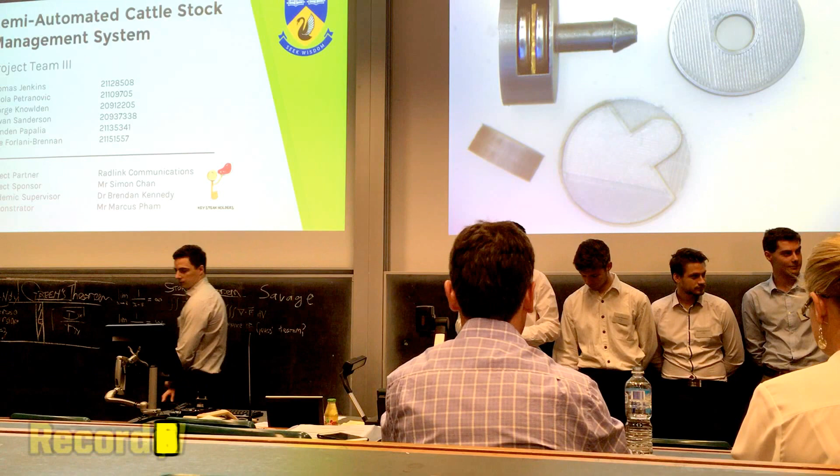This is Project Team 3, which is a very snappy name. No one gave their teams good names this year.

Anyway, they're going to talk about the semi-automated cattle stock management system, and let's start when they're ready. Okay.

Australian cattle farms are experiencing attrition rates higher than ever before. Every year, up to 48% of Australian cattle lose their lives due to undetected bovine-borne diseases. This costs Australian farmers over $270 million every year, a cost that can be avoided through implementation of the appropriate technology.

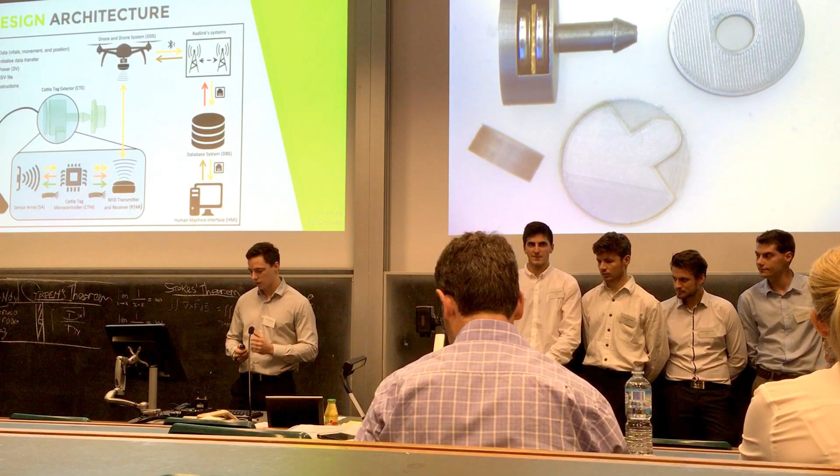What if each cattle was equipped with a cattle tag that could sense the cattle's health vitals, where a drone collected this cattle vital data, sent it through to a database, which then went to a human-machine interface that alerted the farmer of their cattle's health and location.

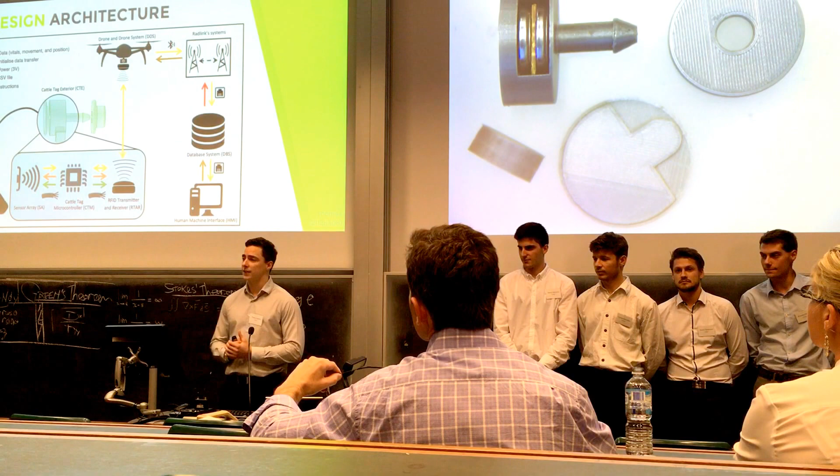This is the essence of the semi-automated cattle management system that myself, Nikola, George, Evan, Branden and Jade have fostered over the duration of this semester. The goal of this project was to assess the feasibility of a drone-based cattle management system.

Now, the first individual component to be discussed is the cattle tag exterior. This encloses the circuitry. As we can see on the visualizer, we have a prototype for you. This cattle tag exterior will protect against intrusion and environment and provides attachment to the cattle's ears.

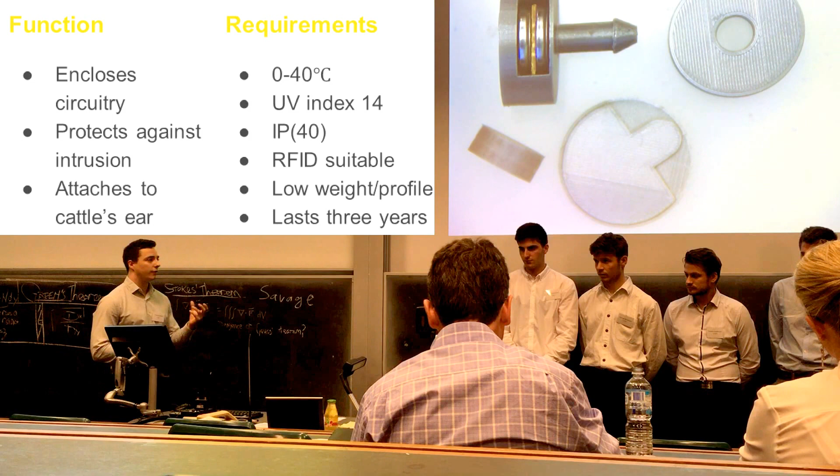In communication with our project sponsor, Mr. Simon Chan, through semi-structured interviews, we identified that this tag exterior must be able to withstand temperatures from 0 to 40 degrees Celsius, a UV rating of 14, an ingress protection rating of 40, and be suitable for radio frequency identification technology. It needs to be low weight and profile and last for 3 years, which is the average lifespan of our cattle.

Now, in order to meet these requirements, it's essential to have an understanding of the relevant standards and regulations. The Biosecurity and Agriculture Management Act of 2013 states that each cattle in Australia requires a National Livestock Identification System tag. This identifies the paddock in which the cattle originated.

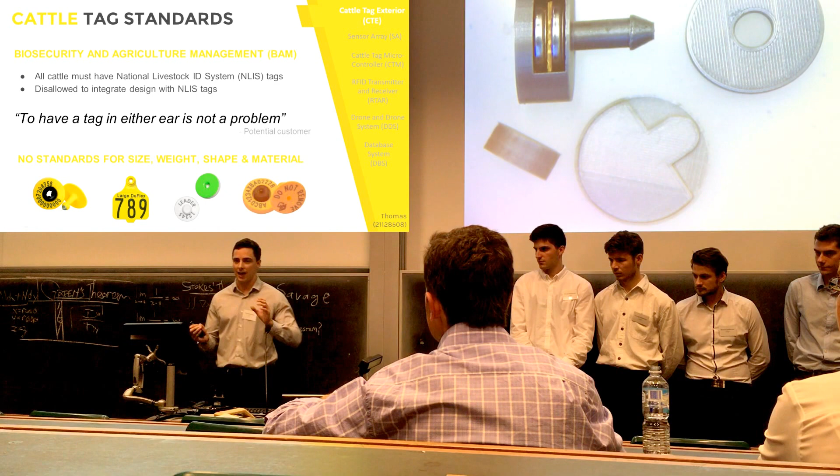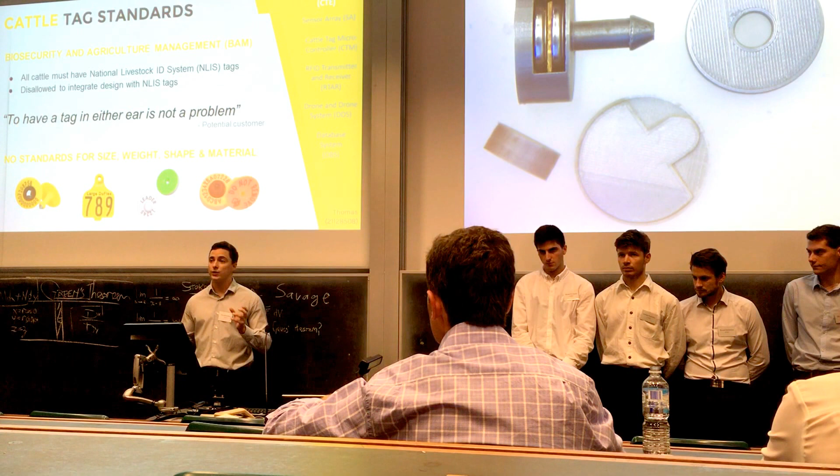It was initially proposed that we integrate our system with this tag, so this tag exterior wouldn't need to be designed. However, the Act disallows integration of 2 different management tags. But communication with potential clients says that it's not a problem to have 2 tags attached to a single cow. This eliminates that market entry barrier that we'd identified.

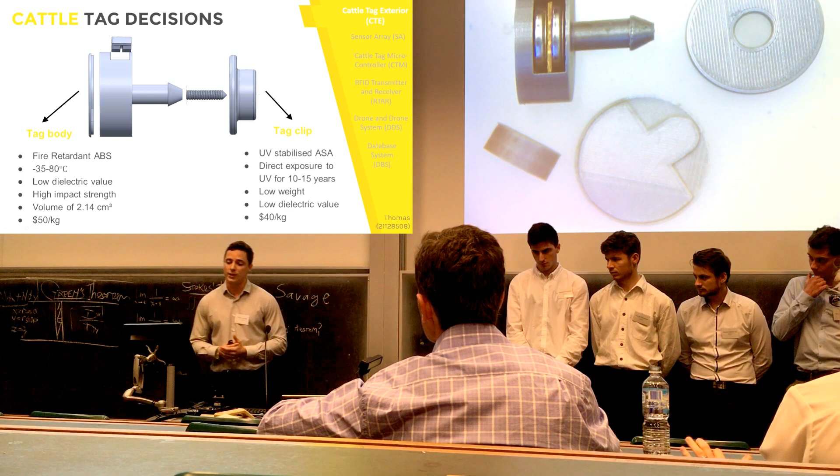As we can see from the diagram and from the visualizer, there are 2 parts of the tag: the tag body and the tag clip. The tag body includes that circuitry, and in order to mitigate the risk of combustion of those circuitry elements within the tag body, fire-retardant ABS plastic was chosen.

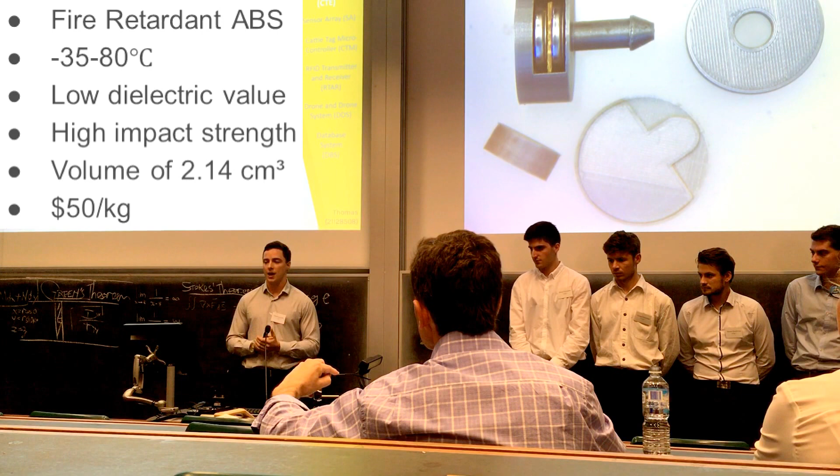This withstands a temperature range from -35 to 80 degrees Celsius, has a low dielectric value of 3.0, meaning it will not attenuate any RFID signals and will integrate well with the RFID transceiver. It has a high impact strength, meaning it can be dropped from 1.94 meters, the tallest cow ever recorded, without any damage, and must integrate a volume of 2.14 centimeters cubed within, allowing space for the sensor array and other components.

Now, the tag clip is on the back of the tag, and that gets direct exposure from the sun as the cow puts its head down and feeds. So the chosen material was UV stabilized ASA, and this can withstand direct exposure to UV for 10 to 15 years. Again, low weight, low dielectric value.

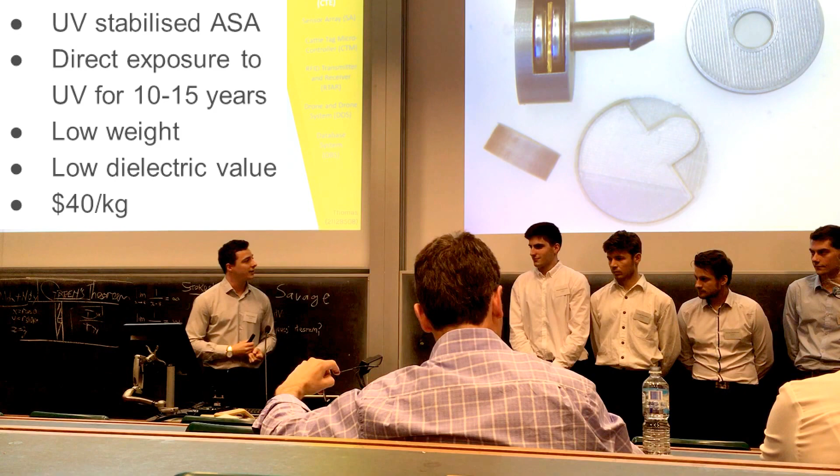I'll now pass over to Nikola to discuss the sensor array. Thank you, Thomas. So the sensor array is the group of sensors that reside within the cattle tag exterior to measure the cattle vitals.

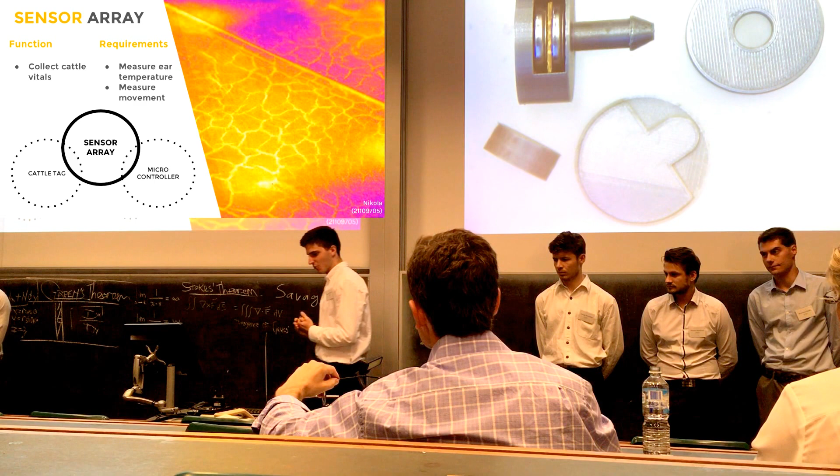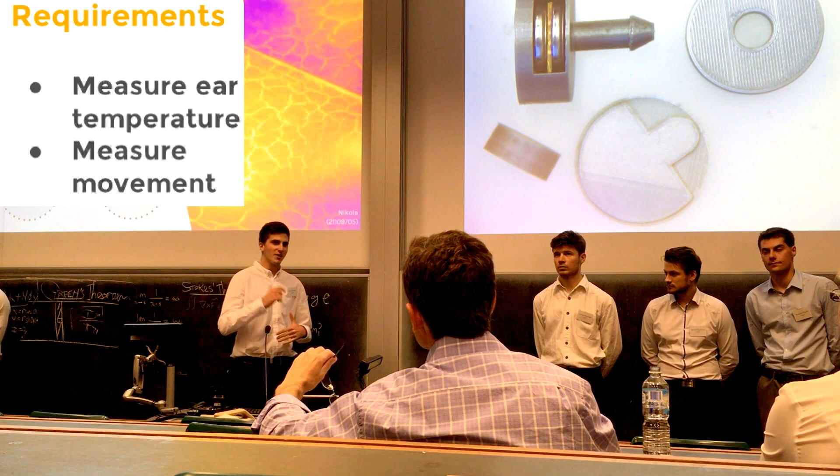These cattle vitals are in accordance with the requirements set out by our project sponsor, which are: the cattle tag must measure ear temperature once every 15 minutes, done using a temperature sensor, and the cattle tag must measure movement once every 15 minutes, done using an accelerometer.

Now, in order for the sensor array to function within the system, it would have to be compatible with the cattle tag exterior and the microcontroller. So what does that mean? That means the sensors have to be small enough to fit within the cattle tag exterior, and they have to be able to send data in a format which the microcontroller can interpret.

So, choosing the temperature sensor: there were three main candidates. The first was the fever tag. The fever tag has shown good results in the past, but the problem with the fever tag is that it would be another tag we'd have to incorporate in conjunction with the tag that you see here.

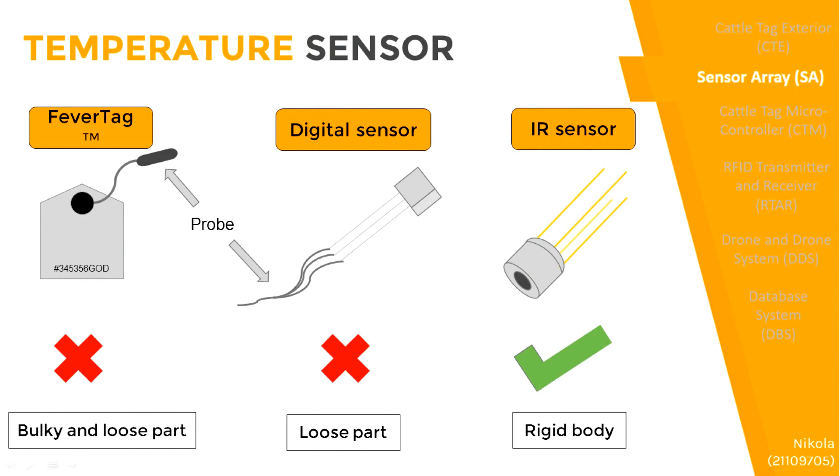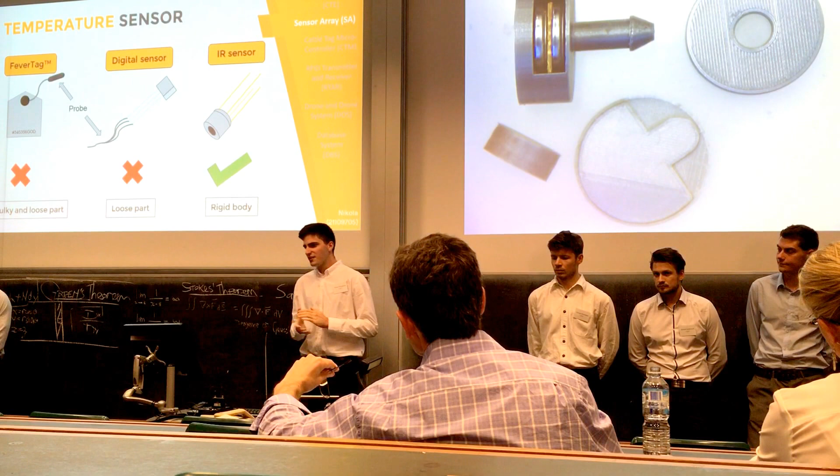This would add extra bulk and weight to the ear. The second sensor we considered was a cheap temperature sensor made into a probe to put inside the ear canal of cattle. After discussing with cattle farmer Mr. Ian Nikola, we found that for a cattle tag to be more durable, there should be no loose parts and it should be as less bulky as possible, in case cattle rub its head against a tree trying to take it off. Therefore, these two sensors, the fever tag and the digital sensor, were taken out of the equation.

So the third sensor we looked at was an IR sensor. The great thing about this is it's a single rigid body that we can put inside the cattle tag exterior, shown right here. This is the temperature sensor we chose, the IR sensor.

Now moving on to the accelerometer to measure movement. At the time of selecting it, we were almost over budget, so I chose an accelerometer which was cheap, able to interface with the microcontroller, and small enough to fit inside the cattle tag exterior.

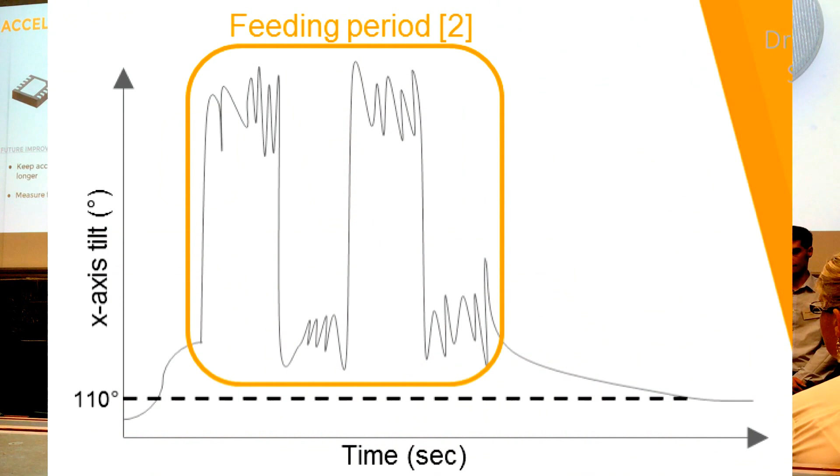At the moment we measure cattle movements for 8-second bursts in 15-minute intervals. In future, we want to keep the accelerometer on for longer to get graphs like the one you see on the bottom right. Highlighted in orange is what it looks like when the accelerometer measures feeding of cattle.

Why do we want to measure this? If we can sense feeding times, we can get a good understanding of how much nutrition the cow has, which is a great determinant of whether your cow is healthy or not. This is a future improvement we'd like to implement, but battery technology isn't quite there yet.

I'll now hand you over to George, who will talk about the cattle tag microcontroller.

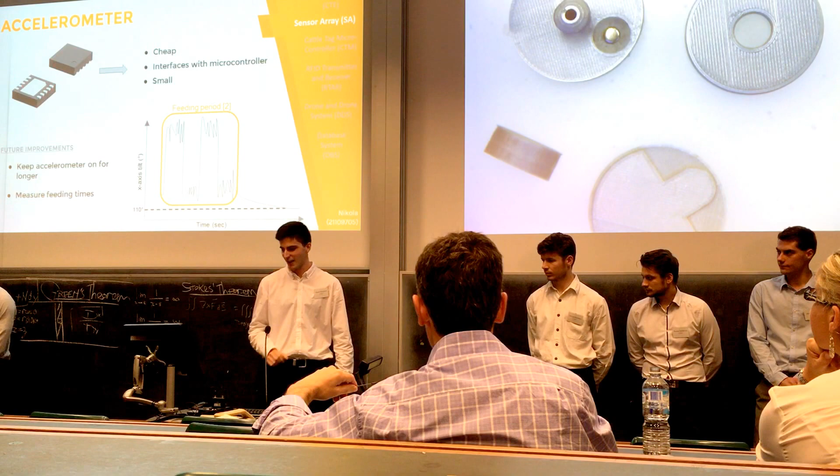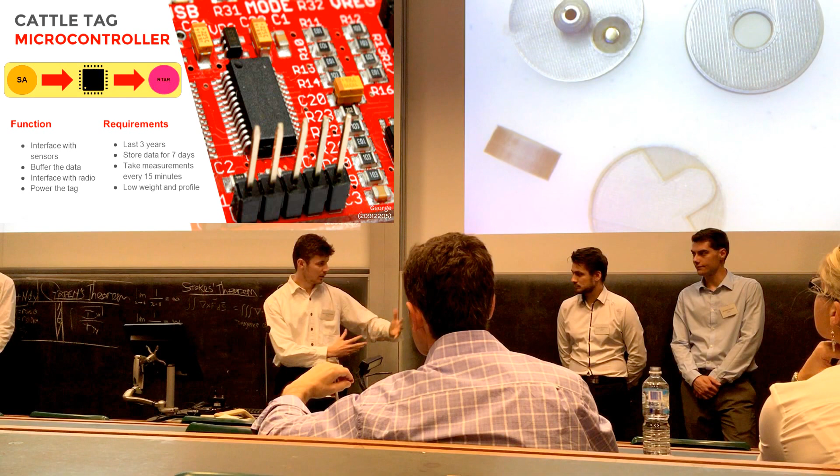Thank you. So the cattle tag microcontroller, remembering this is about the flow of information from cow to server, facilitates this by interfacing with sensors as described by Nick, buffering that data in its internal memory, interfacing with the radio, which Rowan will discuss in a moment, and also powering all of the components within the cattle tag exterior itself.

In order to meet these functions, we also had to satisfy the client requirements. The cattle tag had to last 3 years, the life expectancy of these cows. It had to store data for 7 days in case a cow wandered off and couldn't be picked up. It has to take measurements every 15 minutes using the sensor array, and also has to be low weight and profile to be ergonomic for the cow to wear.

In order to satisfy these functions and requirements, lots of trade-offs and compromises had to be made, so I had to integrate with other team members on this issue. For instance, the more data we gathered, the more energy we'd have to use, the lower the life of the tag. The higher the range we tried to achieve with the transceiver, the more current the tag drew, and hence the lower the life expectancy.

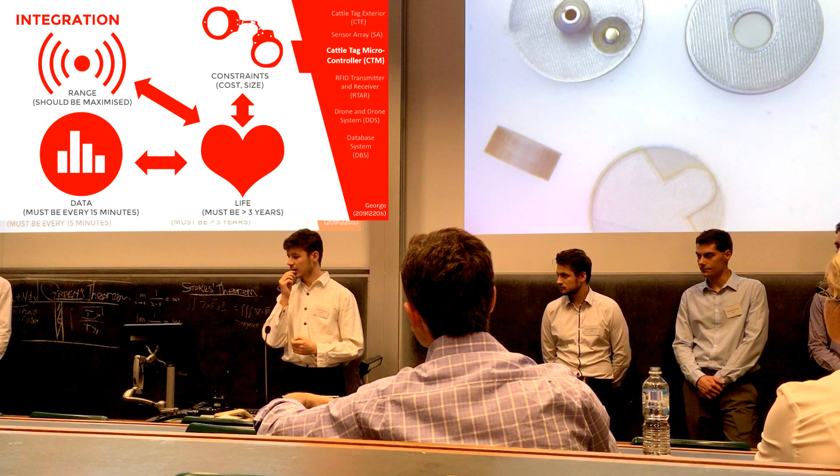There were also base constraints regarding the cost and size of the tag. The cost was driven by budgetary concerns, and the size by the need to fit within the small casing as shown in the visualizer of the cattle tag exterior.

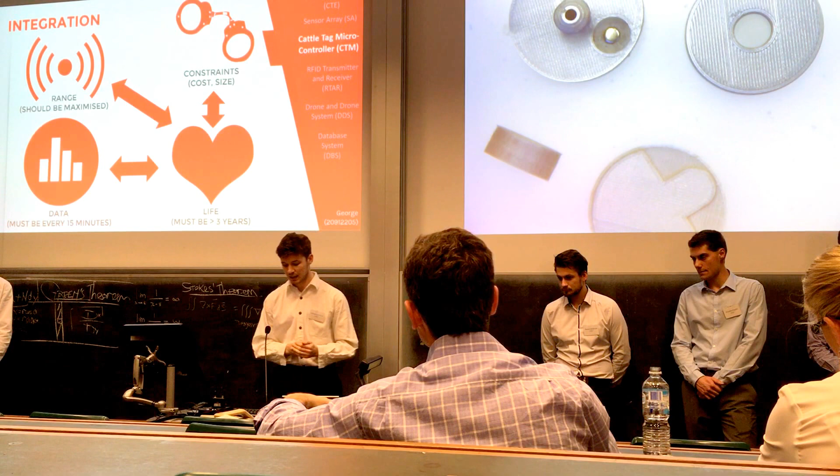After all of that was juggled around, the final design decisions were made: data storage, a microcontroller, and a battery were used to satisfy the functions required.

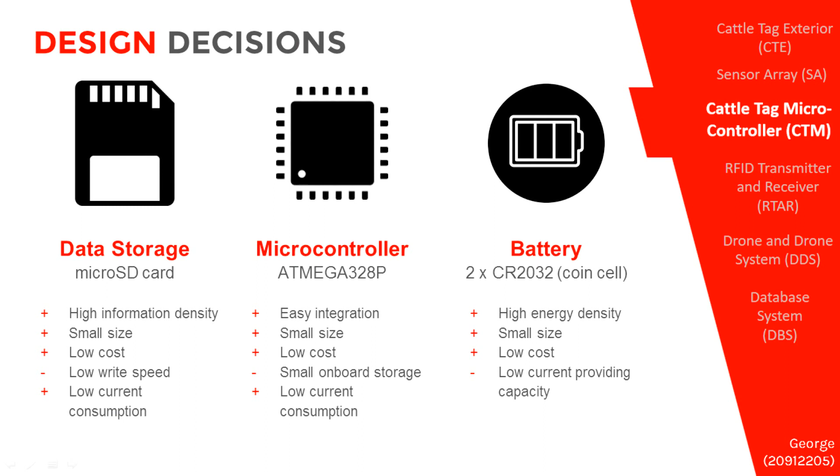The data storage was chosen to be a micro SD card, selected for its high information density, small size, low cost, ready availability, and very low idle current consumption. Unfortunately, the low write speed of the micro SD card is a drawback, but the microcontroller makes up for this with its high-speed RAM memory, even though it's much smaller.

The microcontroller chosen, the ATmega328P, has easy integration, small size, low cost, and very low current consumption for its class, but unfortunately only a small amount of onboard storage.

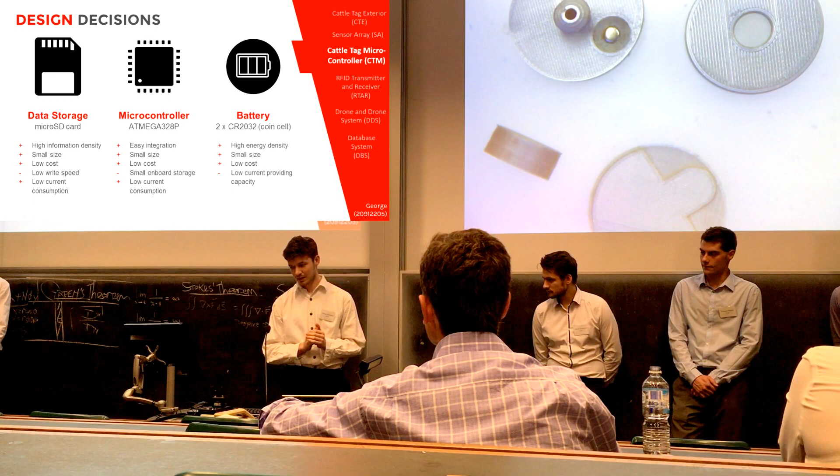The batteries chosen were two CR2032 coin cells, with high energy density for their size, small size, low cost, and good availability, just regular coin cells, with a low current providing capacity. This is made up for by the fact that the cattle tag exterior operates at a very low duty cycle and will draw an average of around 50 microwatts.

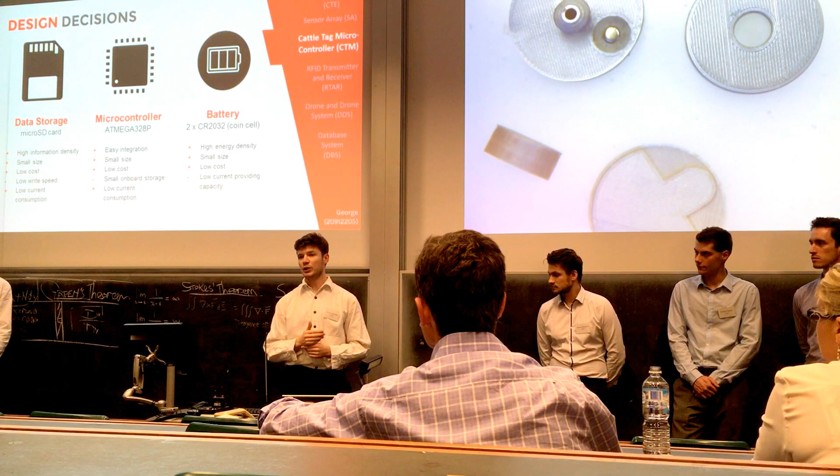So we can see here on the visualizer just a rough representation of the placement of different parts, showing that they all fit inside a container. Now I'd like to pass on to Rowan to talk about the transceiver. Thanks, George.

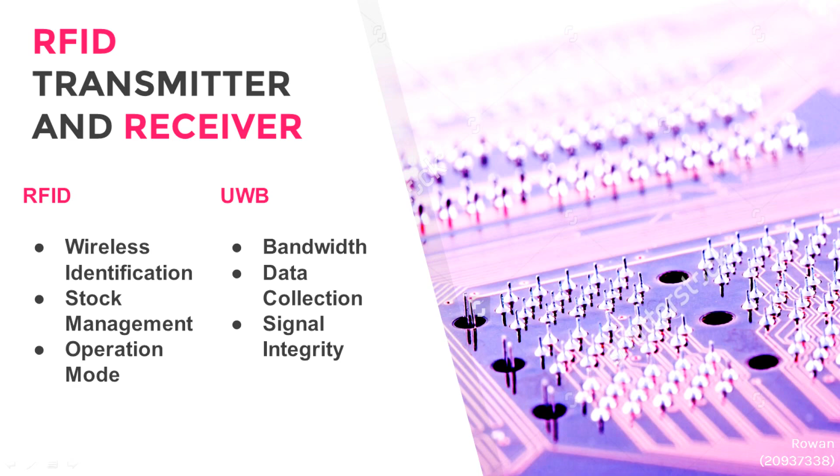RFID, or radio frequency identification, will be the means of communication between the tag on the cow's ear and the drone. There are a range of RFID options available, such as low frequency, high frequency, and ultra high frequency, and selecting the correct type of RFID for us enabled us to take the project from a concept to a feasible cattle management solution. One such type of RFID available was the emerging UWB, or ultra-wideband.

Ultra-wideband transmits data over a wide range of frequencies. This allows for a high rate of data transfer and also improves the signal integrity by eliminating the effect of noise and interference from the environment.

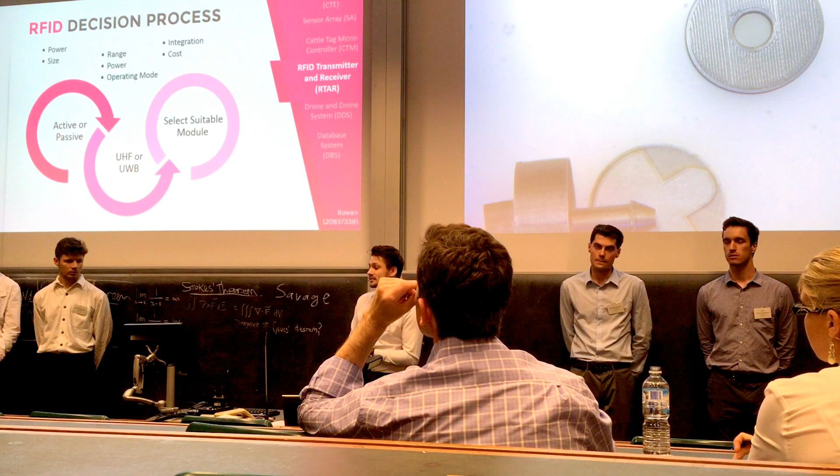I'll now discuss the design decisions and the process that we went through. While it was linear, it was not necessarily straightforward. As you can see, the first decision we had to make was whether to pursue an active or passive tag.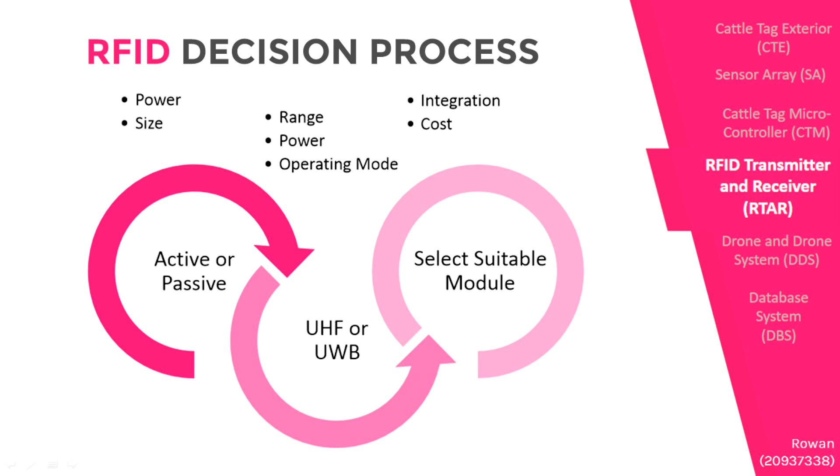A passive tag is smaller and cheaper, however, it's only activated by the incoming radiation of the reader. This didn't satisfy the requirements that we needed in terms of range and data transmission, so we had to use an active tag. This then presented the question of whether to use traditional UHF or ultra-wideband.

We needed a tag that was able to transmit data at a large range, as well as operate consuming so little battery to survive for 3 years, and only UWB was able to achieve this.

This then led us to the selection of a module. We considered a range of commercially available models, and eventually decided upon the Decawave DWM1000, as it satisfied a range of criteria, particularly integration and cost.

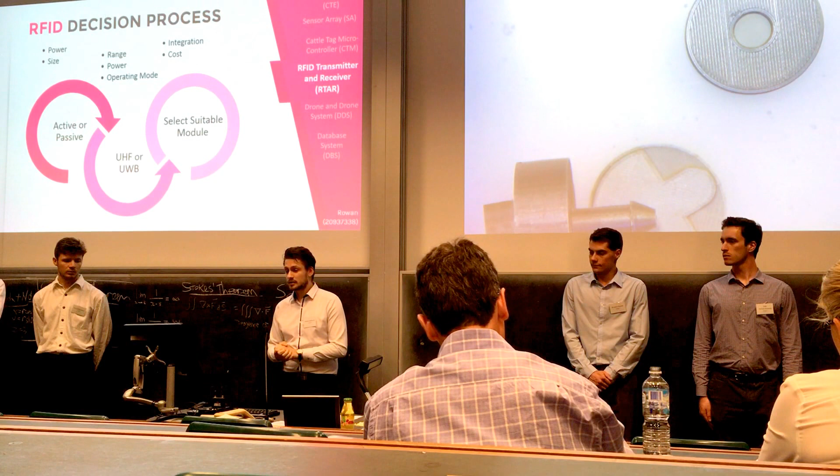I'd like to draw your attention to arguably the 3 most significant features of the Decawave module. Firstly, you can see the read range. It has a read range of 200 meters, which takes a lot of stress off the drone's battery.

We identified early that the drone's battery was a limiting factor of the project, and so to increase the read range, reduce the flight time of the drone, and therefore reduce the strain on the battery.

Secondly, we have the resolution that these tags can identify. We can identify a cow with up to 10 centimeters of resolution, which allows us to identify a unique cow within a paddock, which was a criteria that we had to fulfill for the project.

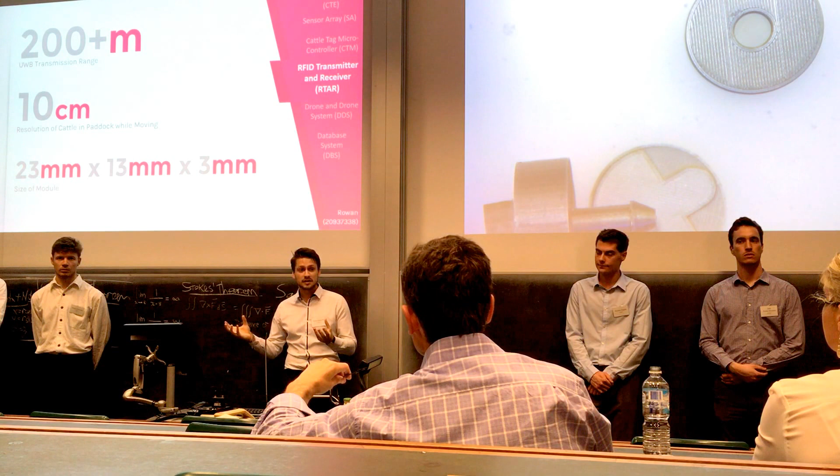Finally, there's the size. The chip is quite small and compact, which allowed for easy integration within the tag itself. This was a must as we were trying to reduce the size and weight of the tag.

I'll now pass you over to Branden to talk about the drone.

Thanks, Rowan. The purpose of the drone system is to serve as a platform for the RFID reader. Once every 24 hours, the drone will fly the RFID reader over the paddock.

The RFID reader will detect the cattle tags in the paddock, extract the data from them, and then the GPS module contained within the drone systems will geotag this data, and the drone systems will store this information for later transfer to the database. In order to achieve this, the drone needs sufficient payload capacity to be able to carry the RFID reader and the drone system.

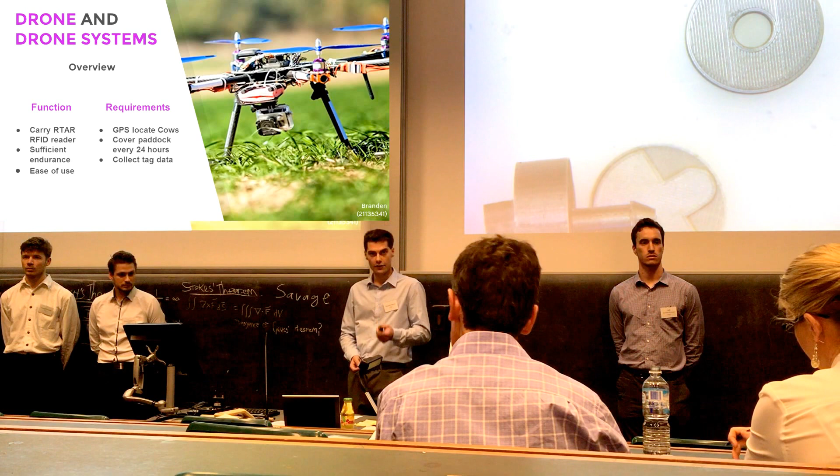The drone also requires sufficient endurance to be capable of flying the required flight path to ensure that the RFID reader has adequate coverage of the paddock. The drone must also be easy to use. We don't expect farmers to have experience using drones or drone systems.

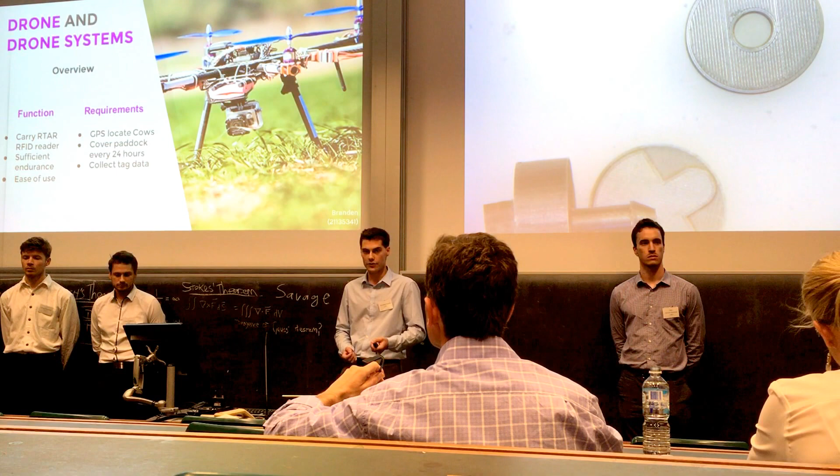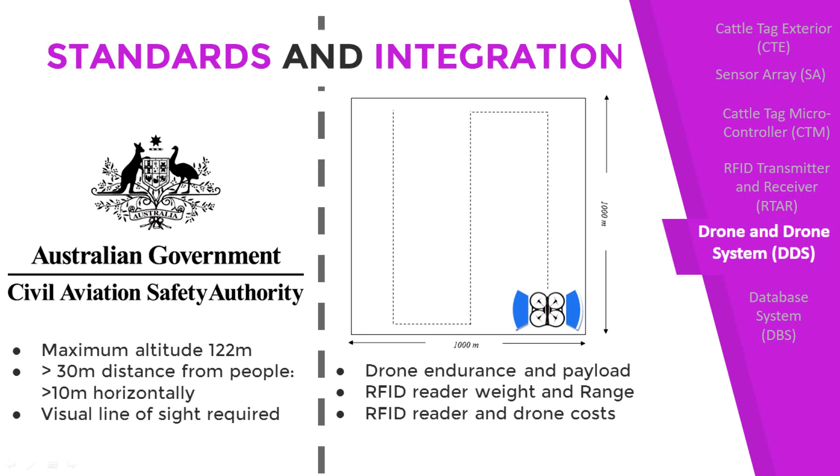The most significant standards relevant to the drones and the drone systems came from the Civil Aviation Safety Authority. Specifically, the drone cannot be flown at an altitude greater than 122 metres, and it cannot fly within 30 metres of any person not directly involved in the operation of the drone.

That is, any person who is not the pilot. Additionally, that pilot must maintain visual line of sight with the drone at all times.

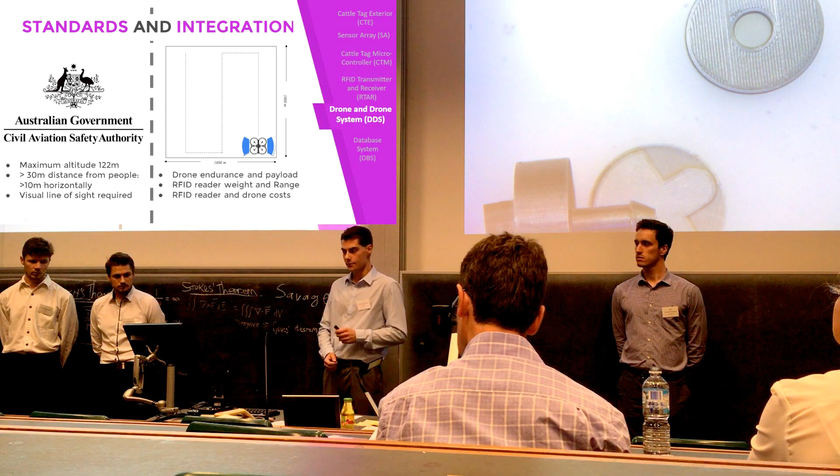When integrating the drone and the drone system into the rest of the project, as it's already been alluded to, the RFID reader is the most significant integration consideration. If you have an RFID reader with a high range, then you only need a drone with a low endurance to cover the same area.

Or if you have a drone with a high endurance, then a low read-range RFID reader is suitable. The relationship between these two was an important design consideration and optimised on the basis of the cost of the two components.

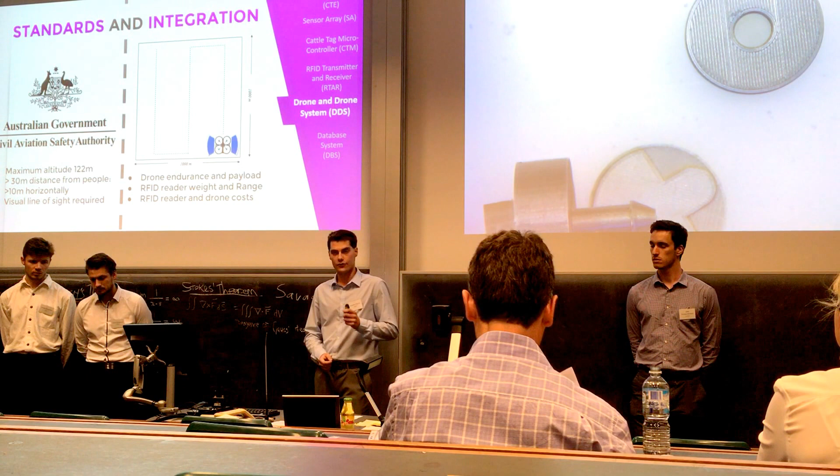Another significant integration consideration between these two devices was the altitude at which the drone would be flown. The higher the altitude of the drone, the greater detriment it has on the RFID read range at ground. However, the drone also needs to be able to fly over the top of things like trees and buildings and things like that it might come across.

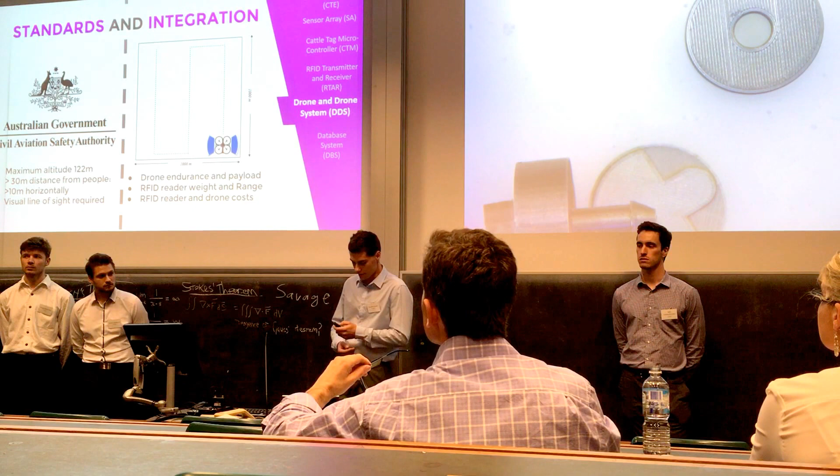In the end, it was decided that 50 metres provided sufficient climbing range for the drone to get over trees and whatnot, whilst also ensuring that it was not too great a detriment to the RFID reader.

There were a number of design decisions that were chosen as part of the drone airborne system, and these are the components that result.

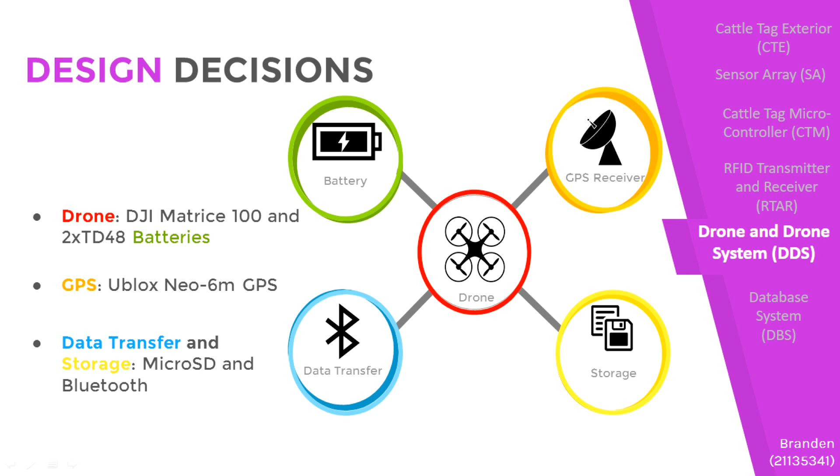The DJI Matrice 100 was chosen as the drone, as it has sufficient endurance to be able to fly over a 5 square kilometre paddock if required, which is in excess of the requirements outlined at the start of the project.

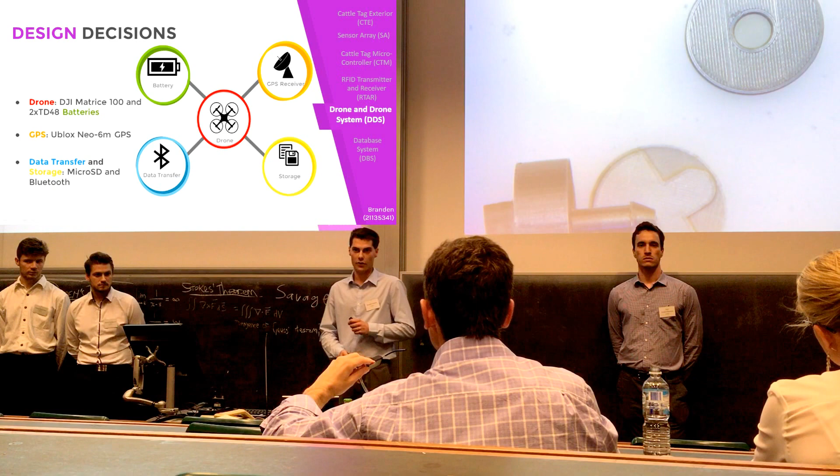The GPS module that was chosen was a U-Blox Neo 6M. This was chosen because it has a wide range of antenna options available, which means if the system was to be used in an area with poor GPS reception, an ideal antenna could be chosen for the project.

The data transfer and storage methods chosen were the use of a micro SD card in conjunction with Bluetooth. Bluetooth was chosen because it is a ubiquitous standard and does not require a physical connection for data transport, while a micro SD card was chosen because it is expandable and offers redundancy. If the data transmission system fails, the micro SD card can be removed from the drone and the data can be physically transferred to the database.

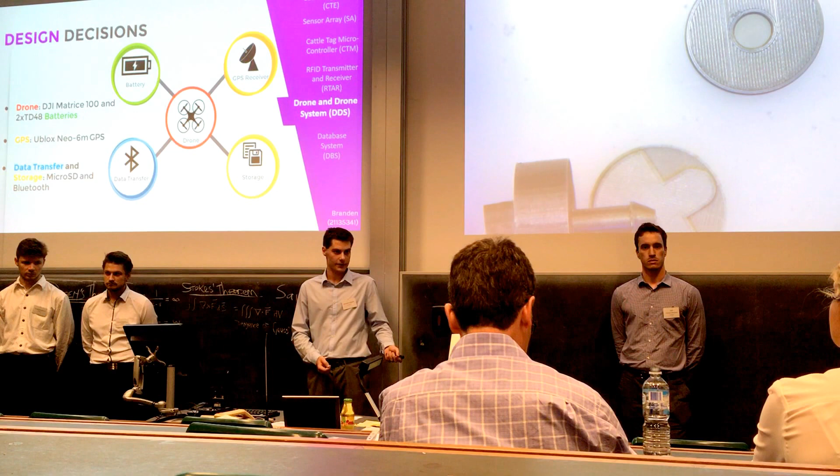Thank you, Branden. Let's talk about data. A key requirement from the project sponsor was consideration at a very high level of the database and the output of the database, the data itself in the form of a CSV file. So the 4 key areas of the database I want to talk about - first of all is the database type.

The database type is one of 2 options, relational or non-relational. Relational was chosen as much better because it's much easier to do initially, especially for a prototype. There's less overhead, it's much easier to set up.

Tying into that is the database management software. Many options were compared and MySQL was chosen because it is free, first of all, really great for the budget, but it also has the data analytics we require.

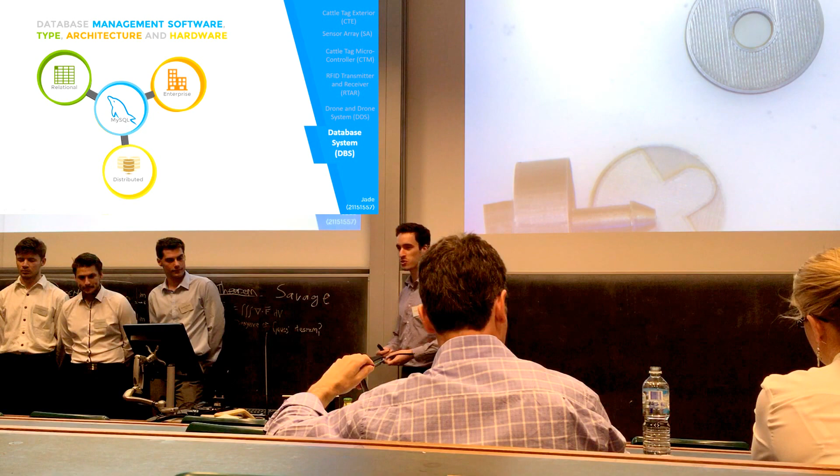We have to remember that all the other systems we've talked about up until this point are about collecting, generating data to ultimately be stored here in the database for the purpose of cattle stock management, which in turn means data analytics - looking at this data, figuring out which cows are sick, where they are, looking for those warning signs. That's what it's all about. And MySQL can do that.

On top of that, as Branden mentioned, it also has opportunity for a graphical user interface, which means the farmers don't have to be proficient in programming, and they shouldn't have to be. Just have a nice GUI.

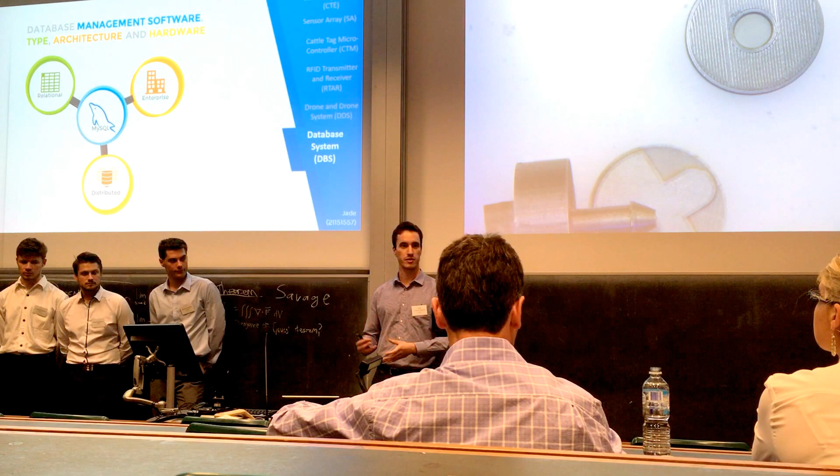Next is the database architecture. Basically, there's no choice - it has to be enterprise. All the other choices are smaller. They're not going to be good enough for the kind of customers you're looking at. They are big plots of land, many computers, many users.

Tying into this is also the hardware layout as distributed. You can put different parts of the servers, the memory, different parts over a farm. What you don't see there is this also needs to incorporate mobile access via the internet through phones and tablets. This is increasingly important with the increasing prevalence of the Internet of Things, not only in society but in industry as well.

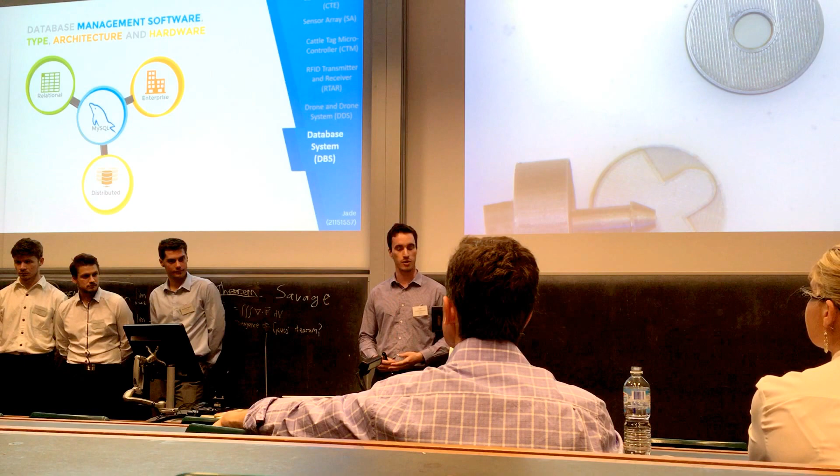So lastly, the data. Key data comes straight from the requirements as we discussed, like temperature and movement. But thinking about that idea of cattle stock management, you also need to look at the idea of the tag and the drone. When considering integration as a whole system, we should also think about system health monitoring.

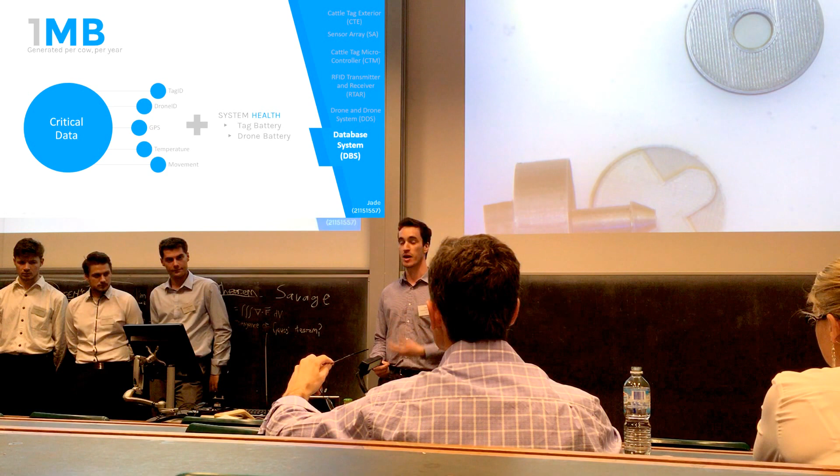Simply by monitoring the battery, you can now have predictive maintenance strategies, which means we are replacing the battery rather than waiting for the drone to run out of power, fall out of the sky, and crash.

Now, a lot of work was done to work out the optimum data, such as integer or character types for each of these, and in total, it's only 1 megabyte per cow per year. Scaling that up to all the cows in the entire world, 1.5 billion cows, it's only 1,500 terabytes. Easily done under a $1,000 budget for storage.

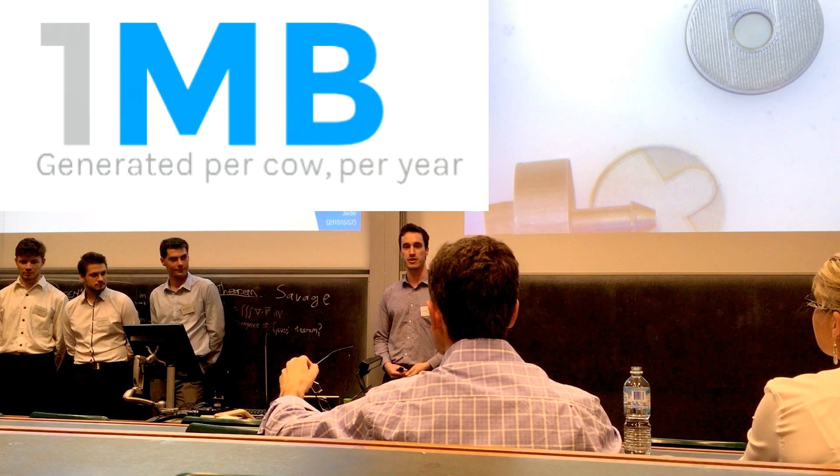That concludes my section. In conclusion, I want to give a big thank you to Mr. Simon Chan, the project sponsor, for the opportunity for this project. And really, for all the work we've done, we've determined that yes, this is feasible, it can be done.

As technology moves forwards, it becomes even more and more feasible as new technologies emerge, such as ultra-wideband. It's not a question of if, it's a question of when. And we in Australia need to be ready and not be left behind by the rest of the world.

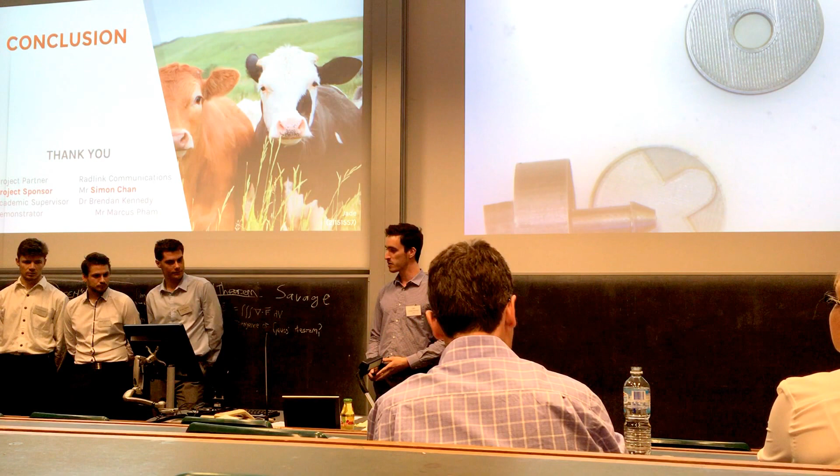Now this project has also been the culmination of 5 years hard work, as Sally mentioned. I want to share key lessons learned with everyone here today, and it's this: just ask, don't assume. As engineers, so often we make interpretations of what we think the requirements of things should be. That might not necessarily be what the project sponsor thinks, or your client thinks, or what the market thinks. And the easiest way to clarify that is just ask - throw them a phone call, send them an email, it's as simple as that.